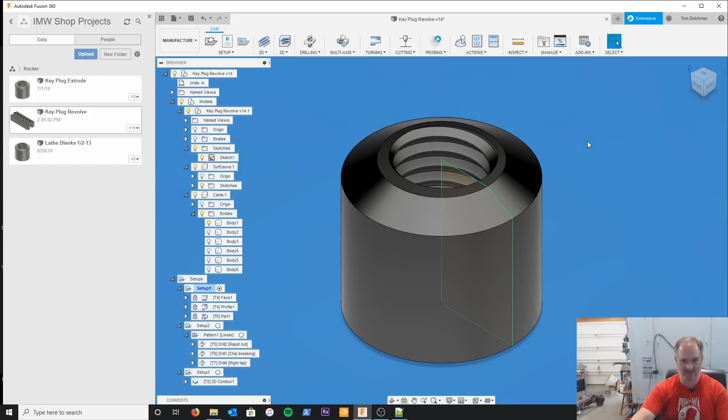All right, where did we leave off? Well, let's see. Let's make sure I've got this running here. I have been doing recording after recording and making mistake after mistake, so let's get this right this time. This is where we left off.

Now, for the lathe, all right, let's flip this over and we'll make a few changes. I'm in the manufacture section here. You see I've got my setup. We come in, face it, put that chamfer in, profile, and then I'm just parting it off. So there's a reason for this. Yes, I know I could drill and tap on the lathe. It would be much more accurate that way.

However, this is a one-time job and I didn't want to have to completely reconfigure my lathe to run this job. And I just didn't have a good open spot on the turret. I was going to end up crashing a tool. It wasn't going to work. I tried. I really wanted to do this all in one setup because, as you can tell, right now it's running, right? The machine's running without me. I'm not doing anything. The lathe's just running, and it would be great to have finished parts right then.

But there's another reason for it, and that's the VMC behind me is tons faster. And so it can drill and tap these far faster than the lathe would. So even doing it, all right, that's our last part for this run. Even doing it in this method, it was going to be faster. So let's take a look. Let's stop now and let's take a look at what it looks like.

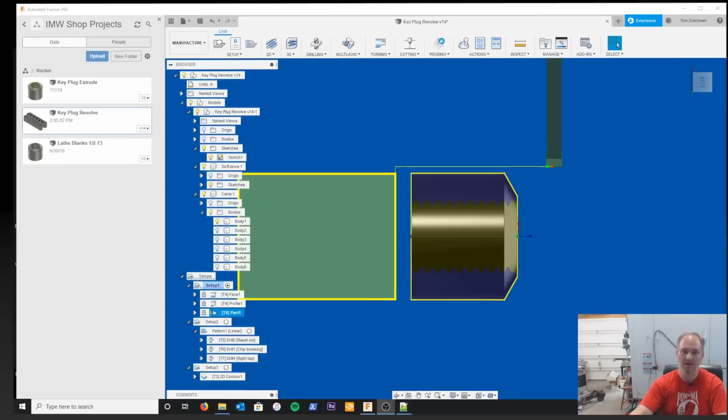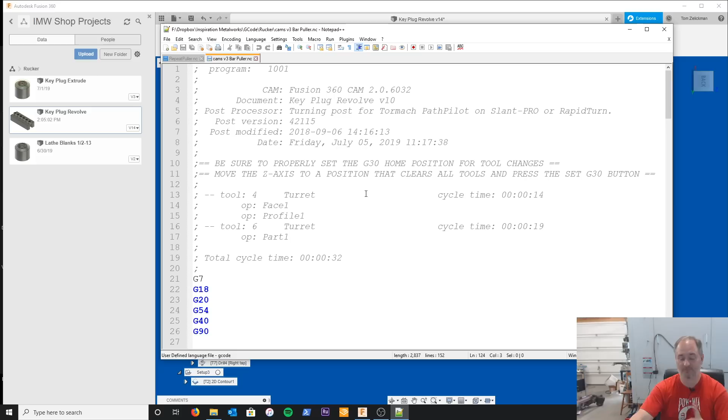Now, to expand on that, let's look at the code, because this is one thing that I've had several people ask about. How do you set up a bar puller and things like that? So let's look at it. I've got zoomed in a little bit. This is Notepad++. So this is mostly code that came right out of Fusion, and then I hand coded a little bit.

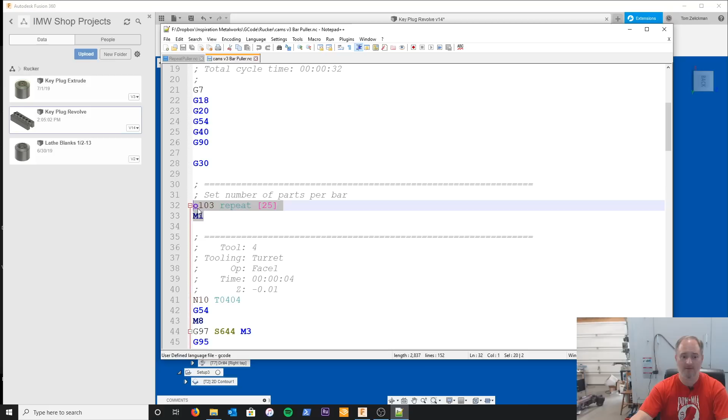So right after you get past all of your basic header information, right? I put in a little routine here. Now this is not calling a subprogram or anything else. It is a routine, but basically, O103, O something tells it to do something. I'm telling it to repeat, and in this case it's 25 times. And then I put an M1 optional stop.

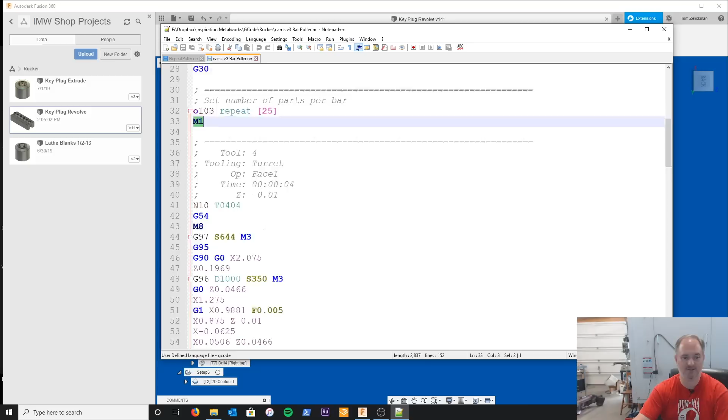Right? Now I did that because sometimes I leave the optional stop on the control. It lets me make sure everything's working right, validate it, then I turn it off and it just keeps running. Makes it simple. Then you just get into all your regular code, right? So there was a facing, profile, here we're parting. So now I've cut everything off, and this is what I've hand coded in here again, the rest of this.

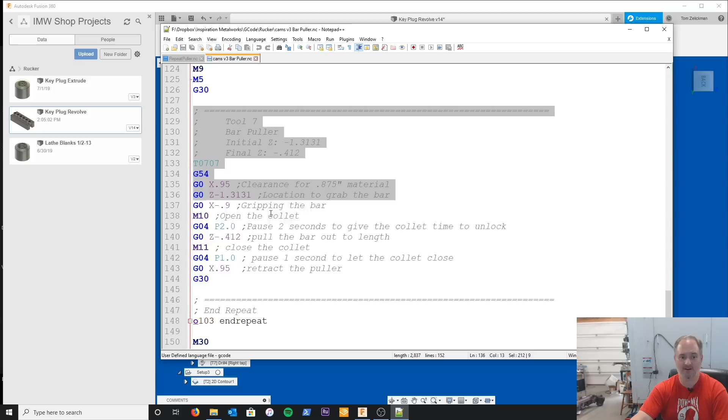So Tool 7, I give myself some information about it. You do your tool change. I'm going to a clearance of about 50 thou or 75 thou above the material. So basically it comes up, it comes over, it's going to engage, unlock, pull out, right? So you saw this in the video. So I come in, I go to the right height, I go to the right depth. So this is far enough in that it's going to grip the material, and then I come down and lock onto the material itself.

You open the collet, I give it a pause. I'm pausing for 2 seconds. Sometimes the collet takes a little longer than others to fully disengage. 2 seconds is far too long. I know I could do shorter, but this isn't optimized. This is a one-time run. I'm not going to be doing this over and over again, so I'm not worried about it.

Did a little bit of math to figure this out. Pull it back out to that start point, close the collet again, wait for it to lock, and then I pull off of the material again. I retract the puller, and I park back at our safe G30.

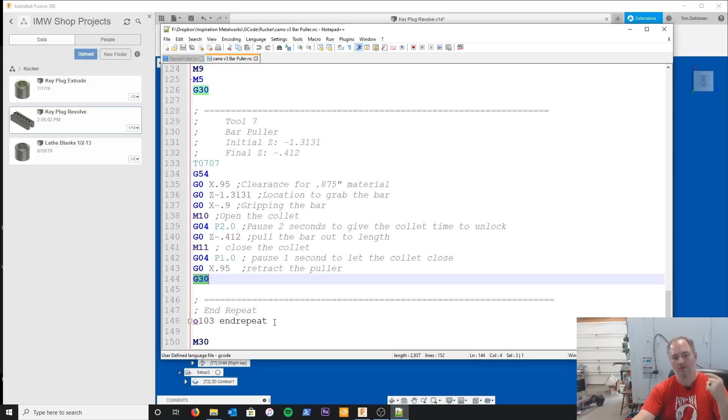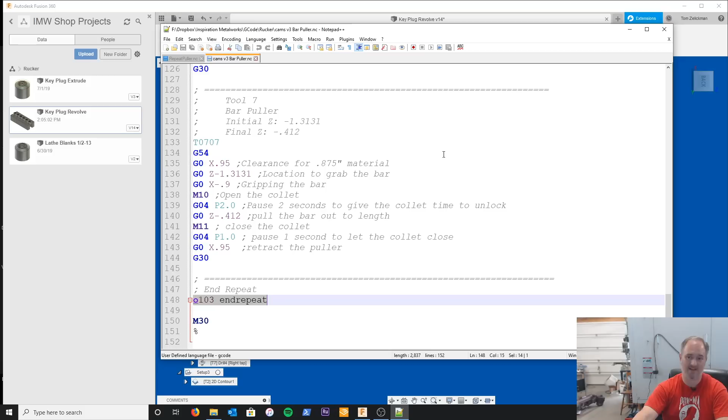Now, it will keep doing this based on the way I have this. It will keep doing this until it hits 25, at which point it ends the repeat, and it comes in, and M30 stops the program. So it's really simple to do. You know, you can add this into your program nice and easy. You can run in subroutines, things like that. I just haven't had the need to do that.

Okay, and I'm back. So I went ahead and loaded up the last bar here, got that running. That's the beauty of this, right, is it's running while I'm doing something else. So now you know what the plan is. What's next? Well, let's turn a few more things on.

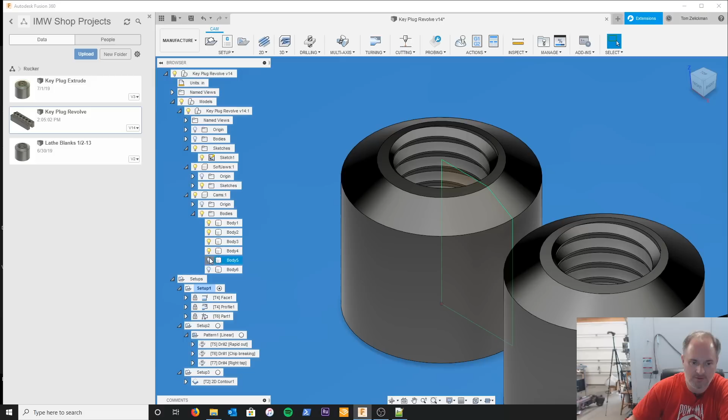So I just did a pattern of our part. They are 1 inch apart from each other. And so I was able to set this up to where in that pattern we can come in and we'll spot it, we'll drill it, and we'll tap it, right? And so the way this works, actually I can run a quick, we'll run it a little on the fast side here.

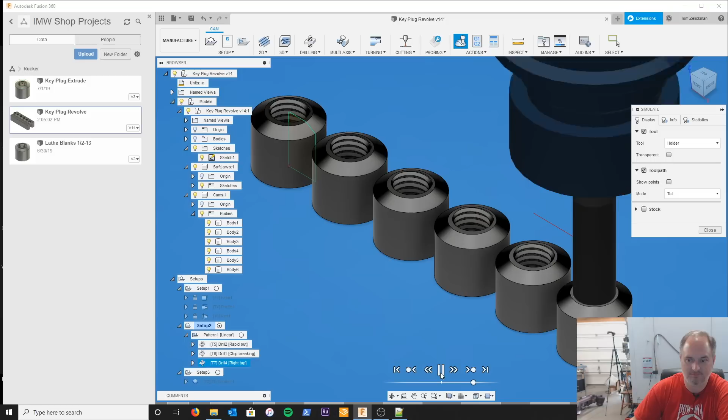So you can see spot, drill, tap, and believe it or not, the Brother is almost that fast, right? I mean, it'll run at almost that speed. It'll probably be more like this, right? I mean, that's pretty close to real time. Not quite, but yeah, we'll do that.

That leads us to our last part though, right? How do we get to that? Well, let's turn on my soft jaws. And we'll turn off the bodies. I had to do a real quick setup here, and basically I created soft jaws. I'll do a different video on soft jaws. This isn't the appropriate time for it, but

basically it's just this contour, and it comes in and it contours everything out. It does it in a couple of steps on both sides, and I actually ran it twice. Rather than trying to put in special passes or whatever, I just let it run twice. You know, it's the same code, wasn't worried about it, didn't have to think about it, right? It's more about trying to be efficient with my time. And so I was able to just let it go, and everything seems to be great.

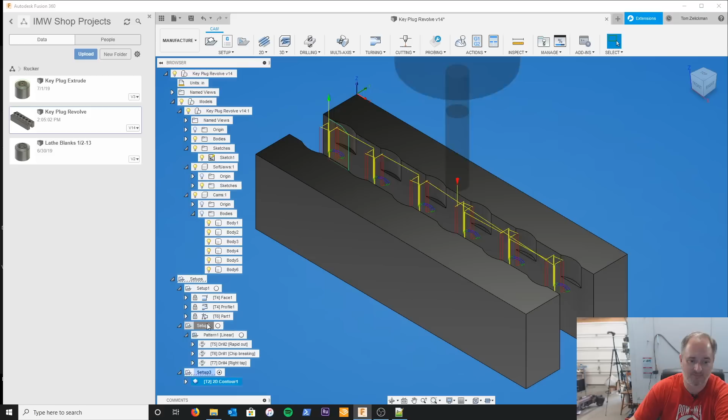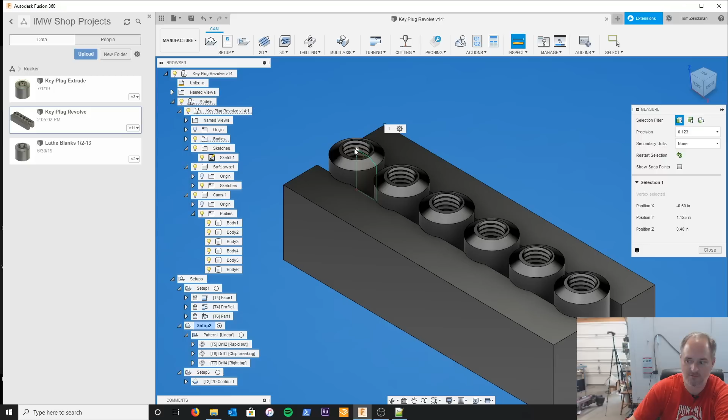So once I did that, we'll go back to this one, we'll turn all these back on so you can see. Basically, our work coordinate system now on this guy is the center of that part. So I dialed that in, and actually I did a little bit of a cheat here, right? So I actually used the inspect command, and I knew my work coordinate system was here at this corner, and then I went over to this corner. It's really hard to get that, right? And I looked at this. What's the X and Y positioning on that?

So I manually jogged to that spot, and then I put my indicator on, and I dialed it in, and guess what? It was actually spot on. So I had already put a bunch of parts in, I torqued it down, and I tested it, and everything was fine. So then I just went ahead and set the X and Y 0. I do still have to set the Z 0 on it, but that's pretty straightforward. I'll get that here before I start running these parts. So next up is to actually start running all of these parts, and let's take a look at that.